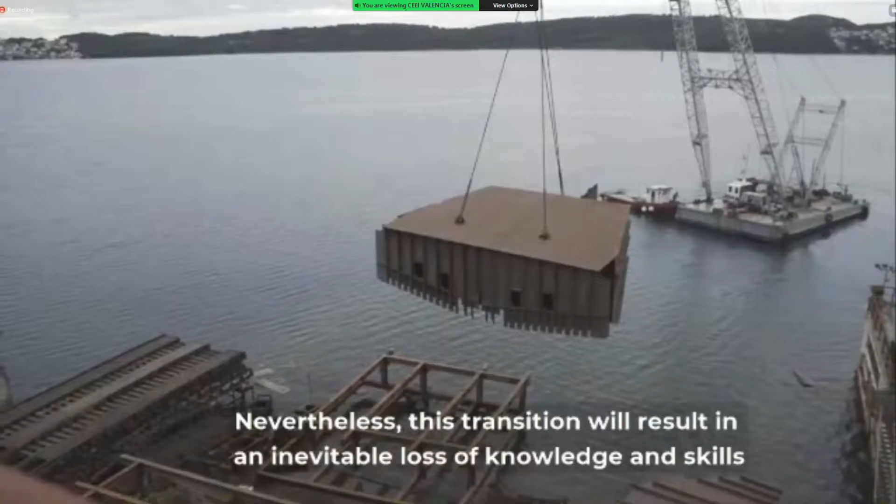Hello from Split. My name is Martin Buchan and I'm Senior Advisor at the Department of Economy, EU Funds and Agriculture of Split-Dalmatia County, one of the associate partners of the Interreg Med project Blue Deal. In our county, there is an ongoing strong reorientation from the traditional fishery and shipbuilding industry toward the service sector, mainly tourism. Nevertheless, this transition will result in an inevitable loss of knowledge and skills that the workforce has created during decades of industrial activities. Therefore, the industrial transition should also be oriented on training and preparation of the workforce for novel, innovative technology, especially related to the maritime business.

Marine renewable energy sector, especially blue energy conversion technology, faces challenges to reach commercial scale of application, while workforce requalification offers a sustainable pathway that overcomes current obstacles. This would help preserve the know-how collected over the years, but moreover, it would open new niches and potential for further industrial development and the creation of high-income jobs. We are looking for consultants, governmental bodies, entities working in vocational training, and enterprises that already restructured their workforce to provide guidelines, measures, or courses which would boost the transition process and result in successful implementation of requalification and training programs.

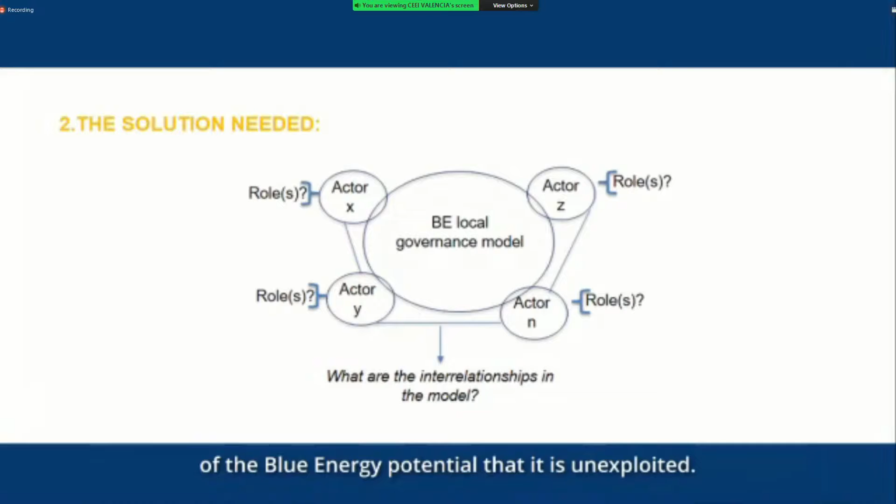The first challenge belongs to the University of Siena, the project promoter, and will take place on the island of Giglio. This is an Italian island situated on the coast of Tuscany. They think that promoting blue energies can help in the transformation of the island into a self-sufficient territory from the power point of view. So they are looking for experts in blue energies able to provide innovative solutions to insert blue energies in the Giglio island.

The second challenge comes from ENEA, the National Agency for New Technologies, Energy and Sustainable Economic Development. The municipality of San Felice Circeo, located in the region of Lazio, in the center of Italy, Mediterranean coast, propose the realization of a simple infrastructure for charging small electric vehicles powered by wave devices, to be located around the infrastructure of the port, in order to enhance and promote sustainable mobility in the city and in the nearby National Park of Circeo.

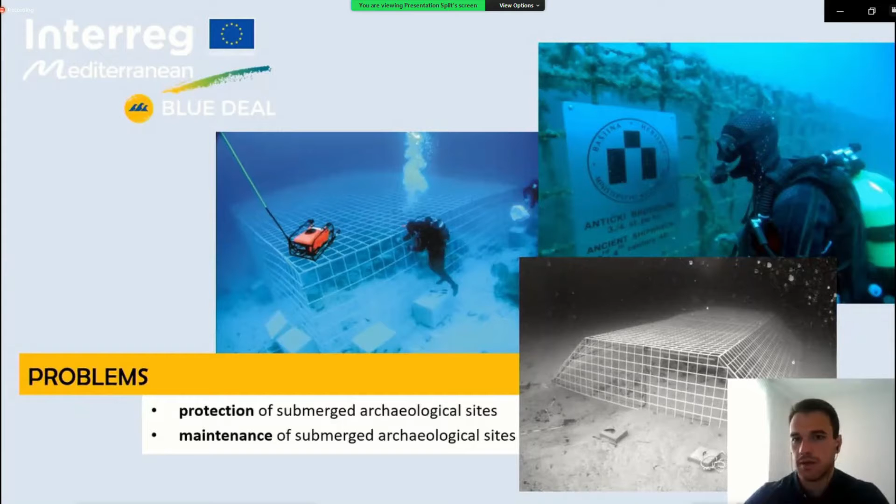The two main problems we detected: one is a very conservative way of protection of submerged sites. Today, the usual way to protect sites is to put an iron cage on them. The opinion is that this protects sites from theft, damage, and decay, but on the other hand, we make these sites unapproachable and gain no benefits from them. Simply put, it's not attractive, practical, or profitable.

Second problem is that Croatia is recognized as a well-known tourist destination, which brings a significant number of tourists. There is always a need to find new tourist offers to keep this number high. This attendance can potentially be a problem because of overexploitation of the coast through building houses, apartments, or hotels, especially in coastal zones where we find submerged sites. Besides, the more tourists come, the higher the possibility of irresponsible behavior in the zone of sites, and because of that, a higher possibility of damaging them.

Having this problem in mind, we looked for solutions that can satisfy both problems. In our thinking, the solution must simultaneously satisfy safety standards and standards of attractive tourist offer. The basic guiding thread was to find a new security and monitoring system and how to create an offshore tourist destination.

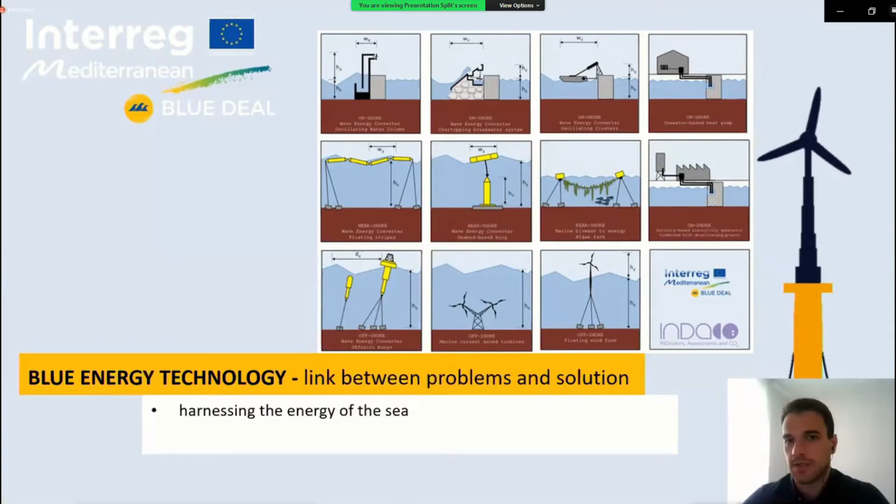And here is our solution. Our solution is to build a floating platform near the submerged archaeological site. The idea is to organize scuba diving on the archaeological site with entertainment content such as treasure hunting, participation in site conservation, and different educational tours to explore the marine environment.

There will be a catering offer in terms of serving food and drinks for refreshment. The platform will use wind energy from windmills and sea energy from floating buoys. The produced electric energy will be used for charging platform batteries, producing oxygen for scuba divers, and for a desalinization process to make drinking water for platform customers.

To approach the platform, there will be a taxi boat running on electric energy with electric batteries. The taxi will recharge from the windmills or buoys.

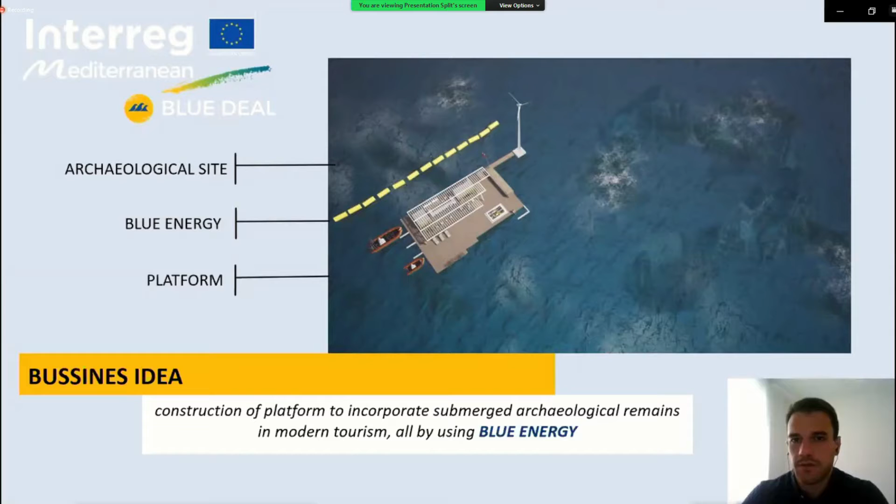In order to ensure successful implementation of this idea, we need a lot of different partners in different business areas. Due to our wish to be more tourist attractive, we need cooperation with tourist agencies, communities, and maybe some cultural societies. To achieve safe diving, we also need diving clubs and diving instructors who will provide short safety and behavior courses. Finally, we need support from producers of diving equipment to have always technically correct equipment.

To explain our business canvas, we will start with the values we will try to offer and create from implementing these ideas, technologies, and services. The benefit of this business idea and solution is, first of all, nurturing and promoting cultural heritage. On the site there will always be ships, and there is always some story about the battles that happened there and things like that.

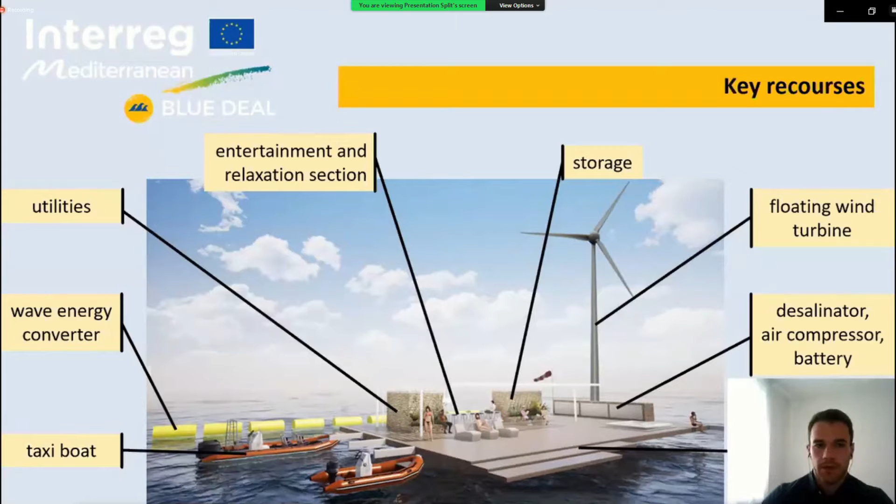In order to create a complete picture, we offer this image to create a sense of what we offer and what we want to achieve. It contains at least most of the resources, values, and services that we want to provide. We see here a floating wind turbine, a desalinator, air compressor, battery, wave energy converter, taxi boat, etc.

And since we are creating values, they are also intended for someone. There are certain groups of people who will use these values, and we suggested a few of them. As it says on the slide, we offer our values to tourists, historians, enthusiasts, explorers, diving clubs, and etc.

To bring this idea closer to customers, we need to reach them through certain channels. Channels we picked to use for advertising are social networks like Facebook, Instagram, and Twitter, websites, maybe like booking, tourist agencies, and information panels and posters.

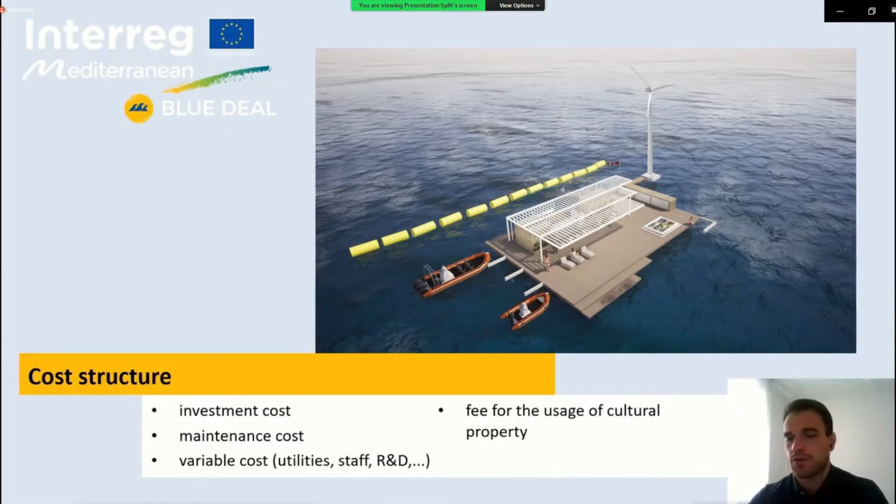To accomplish this idea, we will have different types of costs, but some are the foremost. They are investment costs, which are expected to be higher, maintenance cost, variable cost for staff, utilities, research and development, project development costs, and there is a fee for the usage of a cultural property because the sites are usually state-owned protected areas. In order to satisfy costs, we expect revenues from our activities.

Revenue is expected to come from maintenance and surveillance. Maybe the state will pay us for the surveillance of the site. We expect revenue from tickets, maybe different types of tickets, all inclusive, only for entrance, revenue from diving courses, equipment rental, revenue from a taxi boat, revenue from souvenirs and catering services.

Also, we will have some additional revenues because we produce electricity, and the produced electricity we can sell to the boats coming on the dock. Also, we can use the produced electricity to produce oxygen and water for drinking, which we can sell to the customers of the platform.

So we are coming to the end of this presentation, and we have a little simple conclusion. In order to solve this challenge, we tried to be creative, and it was really productive for us. It was very interesting to see how everyone can put a piece of their idea on the table to create something new and innovative. It gave us new opportunities to think about it and to see how sustainability is possible everywhere, no matter how demanding the task is.

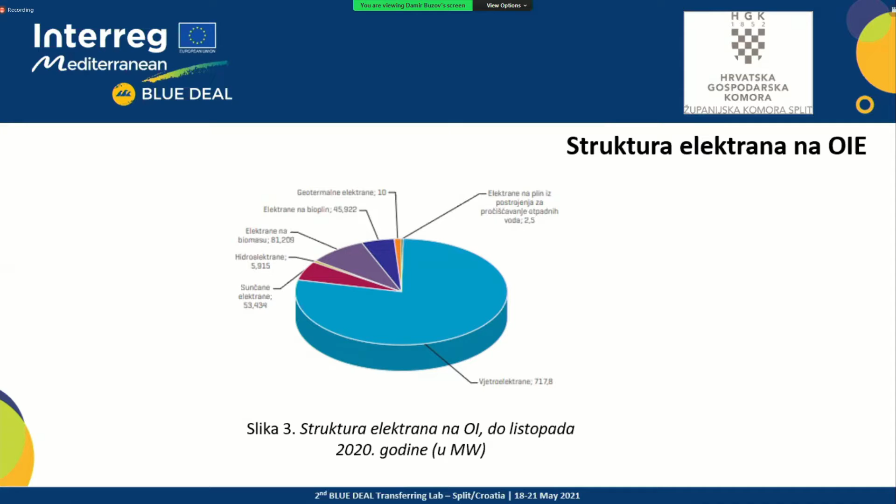As far as the other segments of the market are concerned, we will talk about this within the next few minutes.

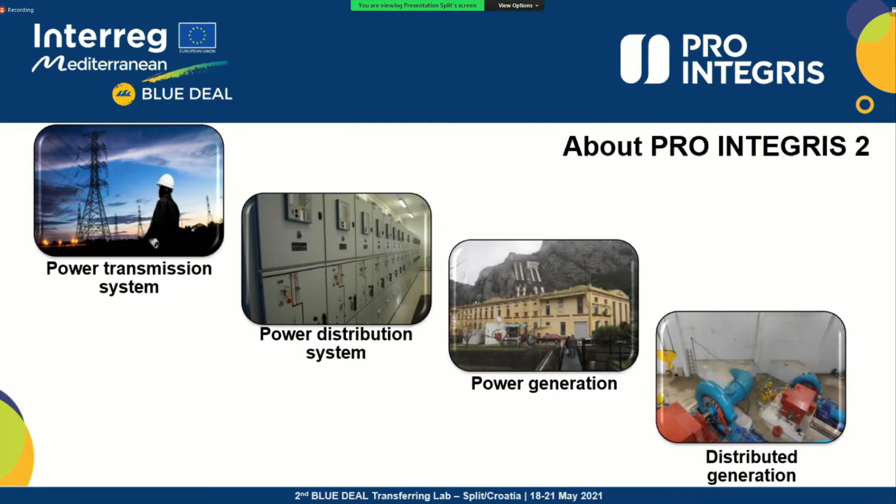Practically we work in all areas of the energy sector and industry, meaning production, distribution, distributed generation, and in this way we came to the opportunity to work in the wind business. If you look at the map, you can see that as a company we work worldwide.

So, working in the energy sector, we came into the opportunity to work also in the area of wind business. Practically, for us, working in wind business is not a lot different from working with any other substation automation systems. We started with basic primary testing like current and voltage transformer testing, and then over time we developed our cooperation with companies working in this business, doing protection testing, engineering, SCADA system testing, and similar things.

On this screen, you can see the list of the projects we already participated in. There are lots of projects. Recently, the two latest projects we are working on now are Hornsea 2 and Changhua. These projects are started and are being performed now in Singapore, and today we have more than 10 people working directly in Singapore in shipyards.

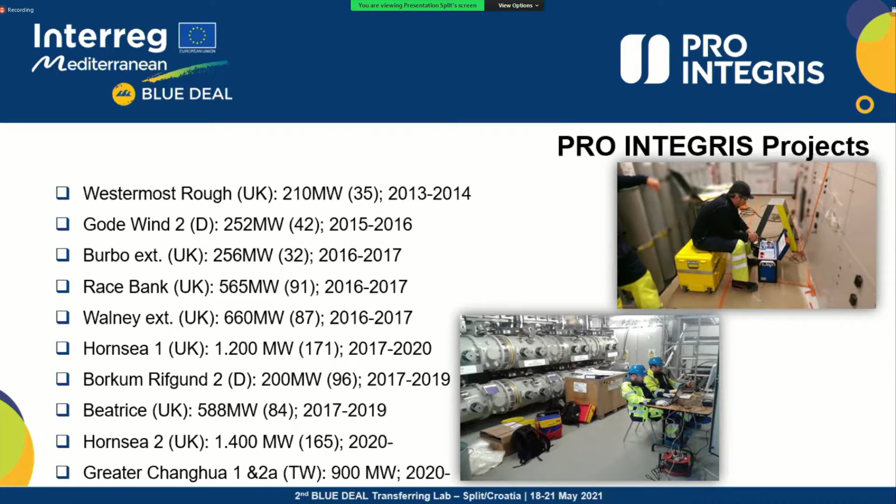You can see from the screens that, for example, Hornsea 2 will have 1.4 gigawatts installed power. In comparison, Croatia now has around 2.2 gigawatts consumption, so it's a huge amount of energy. This will be produced by 165 turbines, around 8 megawatts per turbine.

There are two ways of transporting energy from the wind farms to shore. One is with an offshore AC substation at sea, where you have transformation from middle voltage to high voltage, and then with the high voltage cable, the energy is transported to the onshore substation. There is also the possibility to have an HVDC converter station, where you transform AC energy to DC transmission, and then with DC energy you go to the onshore substation where you convert back to AC energy.

Really, I don't know the exact reason — I think it's a calculation of what is the optimal solution for energy transportation. Our experience so far is that we worked mostly on normal AC substations, not on HVDC substations.

I will show you shortly what is the scope of the work generally that we do in this wind farm business. This is the example of Burbo Bank substation, where on this map you can see how the whole system is geographically positioned. You have the offshore substation in the middle, with 8 strings and 4 turbines per string, each turbine with 8 megawatts.

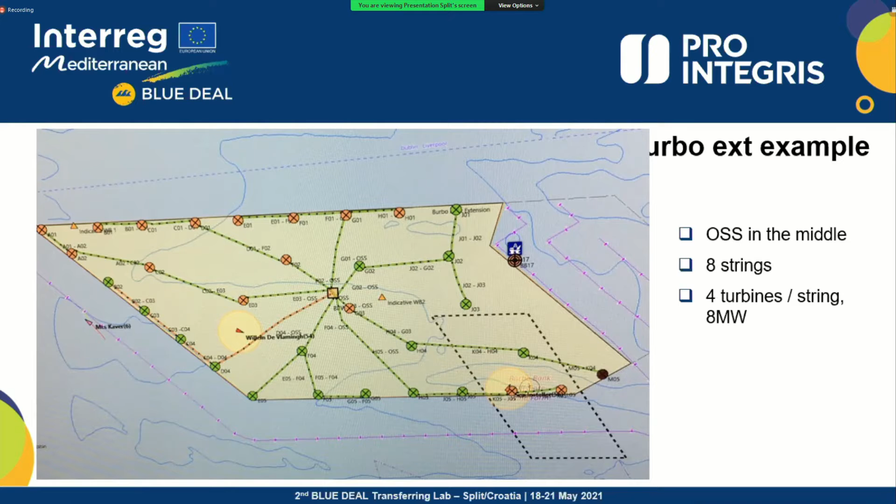In a shipyard, the offshore substation is constructed, and then erection and whole power system testing is done in the shipyard. As you can see from the slide, the estimation is around 3 to 4 months for construction and 3 to 4 months for erection and testing in the shipyard.

In the shipyard we have the high voltage substation and middle voltage parts. For the high voltage parts, here you can see the picture of a 220 kilovolt GIS system, gas insulated system. This is used when you don't have enough distance for such high voltage. This substation consists of one single 220 kV bus bar with two transformers and one export cable feeder to bring the energy to the onshore substation.

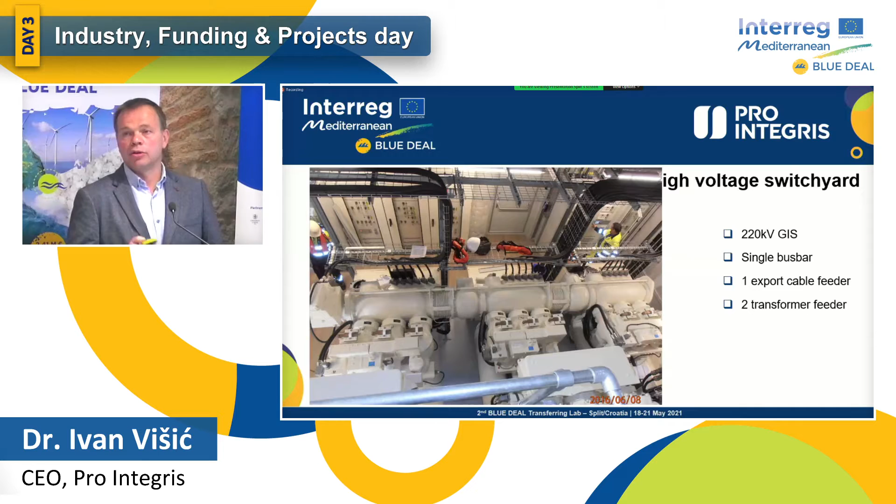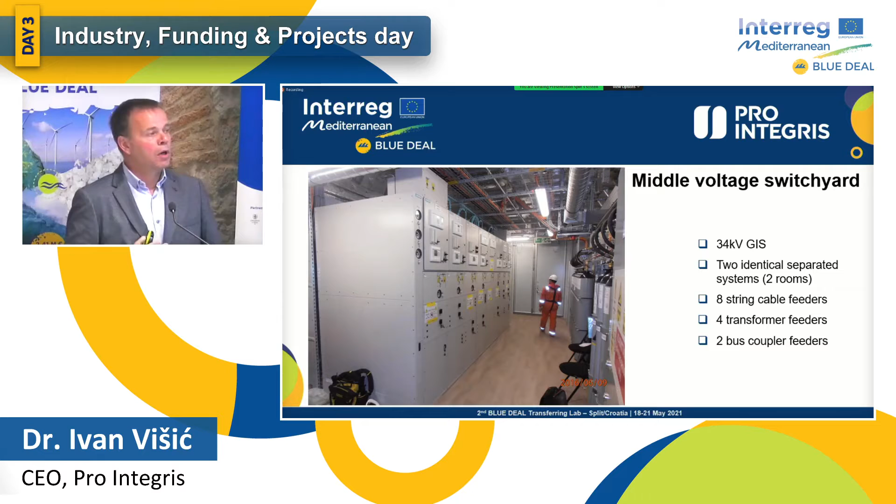The power transformers — we have 2 power transformers stepping up the voltage from 34 kilovolts to 220 kilovolts. Each transformer is 200 MVA, with oil natural, air natural cooling. What's specific is that the radiators are mounted outside of the house, which is normal because we use the cooling of the wind to also cool the transformers.

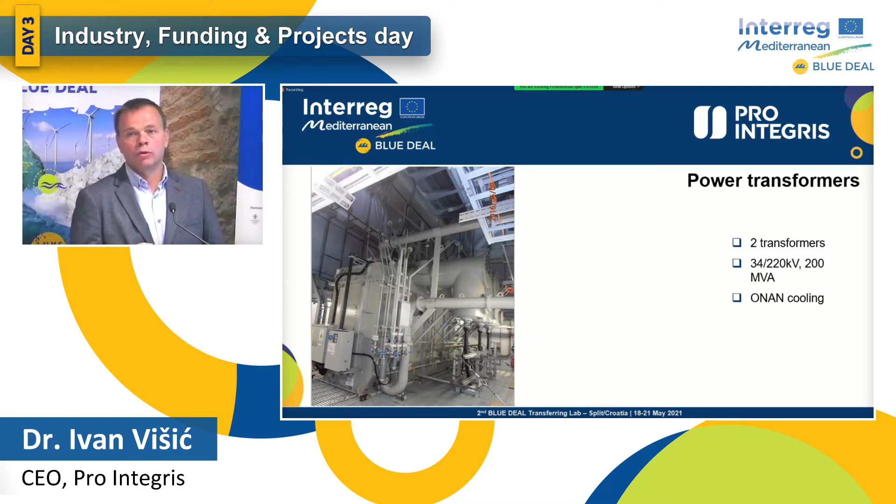When the work in the shipyard is finished, we have to transport the platform and the base, called the jacket, to the sea. For this, a barge is used, and this work takes around 2 weeks from sail away till placement. For Burbo Bank, the offshore platform was based in the Irish Sea, so the time was around 2 weeks.

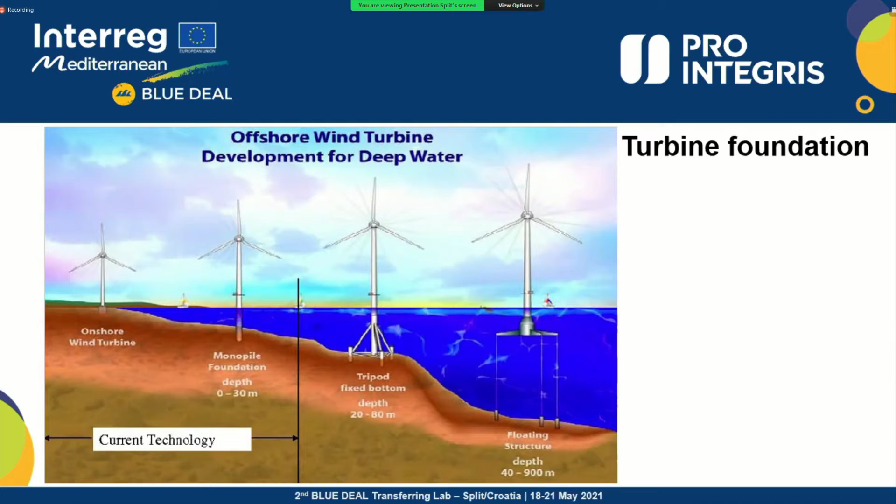Generally, there are different ways of foundation for wind farms, wind turbines, and platforms. Mostly so far we are using monopile foundation, because in the Irish Sea and the North Sea, where all those projects were installed, the depth of the sea is not above 30 meters, but there are also other ways of turbine foundation.

If you compare the turbines produced so far, in 1991 the turbine was 0.45 megawatts with a blade diameter of 35 meters. Today we've arrived at 8 megawatts with more than 160 meters of diameter. And as far as I know, today we are also producing wind turbines with 10 megawatts and more.

There are also some special equipment that we have to use at the sea, so you have to be trained and educated to work at the sea.

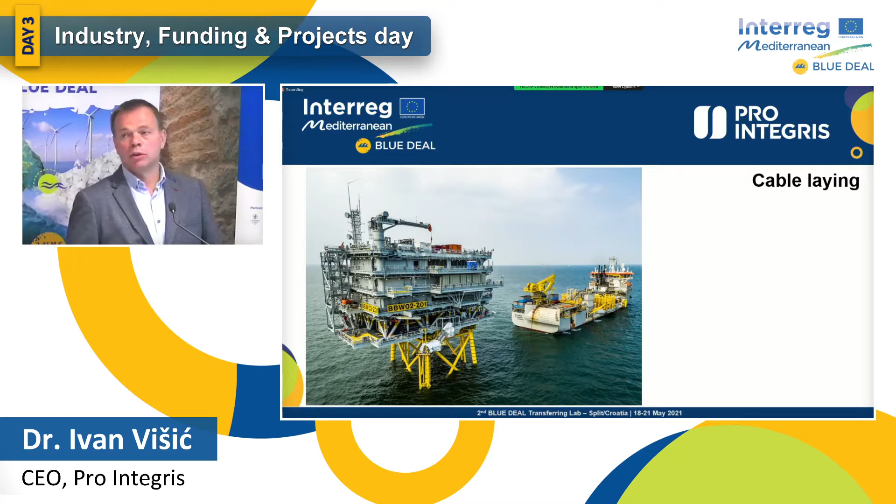And also there are special boats that are used for turbine mounting at the sea.

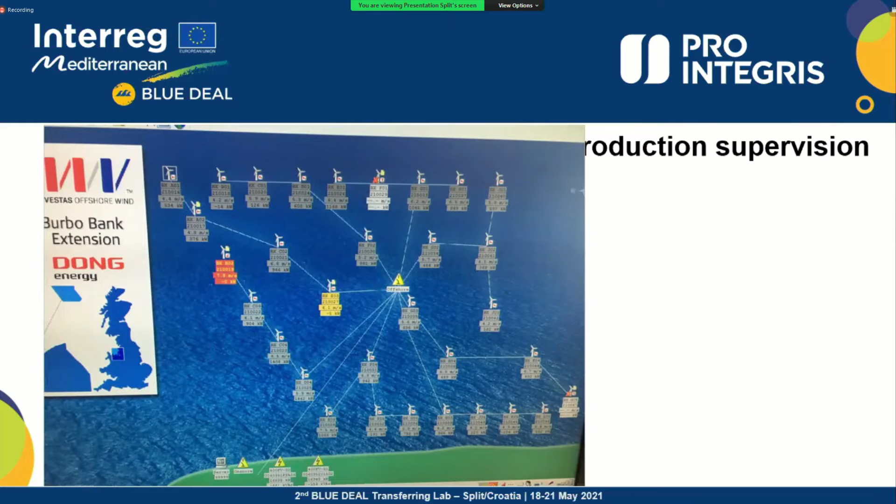At the end, when we commission and put into service the wind farm, you have different SCADAs that are used to supervise and control the wind farm. Here you can see one example of the wind farm SCADA with which you are supervising the production of each turbine, or you can see if there are any problems on each turbine.

So generally, somewhere in the invitation to this presentation, I saw the question: what are the benefits of those wind farms, or offshore wind farms, for the local community?

Generally, from my perspective, I can say that this would mean more work for shipyards and more work for our power industry here. For a local community, I can see the produced energy. If you can produce some amount of energy, this would mean a lot for the local people and also for the whole country.

So, this is the end of my presentation. We are a company from Split, but we also have offices in Zagreb.

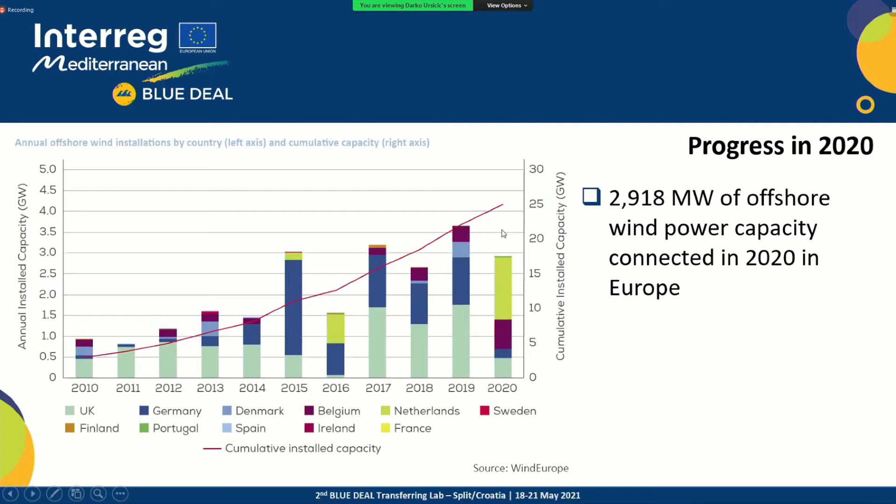In the next slide, we can see the breakdown of European countries. There are a total of 12 countries with some installed capacity, but you can disregard everything after number 5, because UK, Germany, Netherlands, Belgium, and Denmark have, I believe, 99% of overall installed capacity. All others have just a few turbines installed and some, I don't know how to call them, learning projects ongoing, like 1 or 2 turbines.

On the asset side, packages include wind turbines, foundations on which turbines are built, interarray cables connecting turbines inside the wind farm, and export cable connecting the wind farm to the grid overall. There is HV equipment, of course - high voltage transformers, switches, and similar equipment. SCADA and protection is something our colleagues from ProIntegris are experts in. Offshore substation, there was a picture in the previous presentation also. An onshore substation is not different in any way from similar substations for other types of power plants.

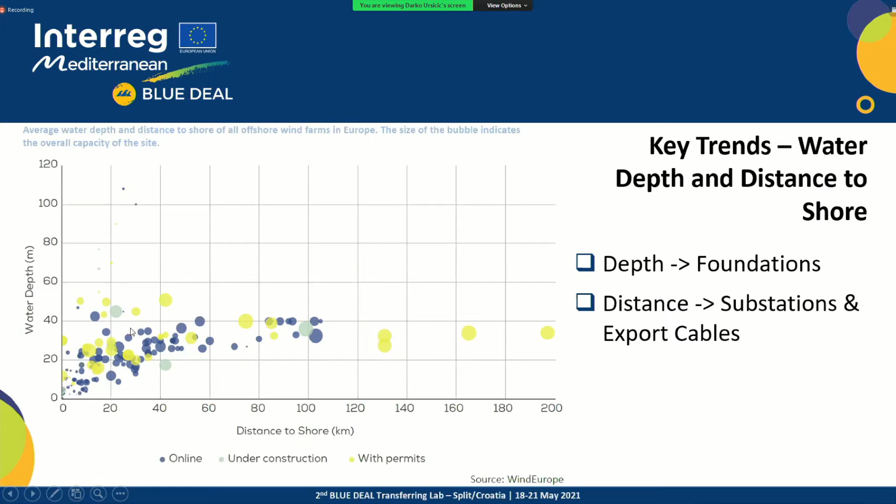Now we go through these different packages. The first one is foundations installation. The vessel used is a floating crane.

This is a floating crane or jack-up, but mostly it's a floating crane because that's how it's done. In this picture, you can see how the floating monopile is pushed by tugs to the area below the crane, where it is upended, positioned, and then hammered down. This process is sensitive to weather, waves and wind. We cannot do it in strong wind or big waves.

The greatest risk is seabed conditions. Investigations are performed, but you never know. There could be boulders, which are big rocks present underneath the sea bottom. Another condition is erosion. You do an investigation, and after maybe 2 years, because of erosion, the sea bottom can look very different than it was then.

The problem with this geophysical survey is limited depth. We cannot properly survey the full depth in all locations, so that is always one risk coming from that.

Scour protection is just the dumping of big stones designed to keep the area around the foundation in place, not impacted by erosion.

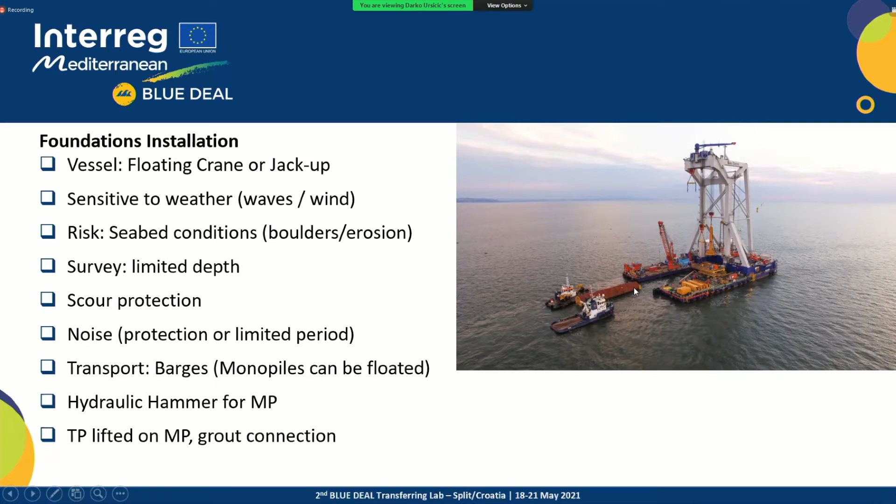For jackets, everything is very similar, except they are not hammered down - just the corners are hammered down with piles similar to the monopile. Floating is a bit different, but then you fix it with anchors, which is in a way a similar operation.

The next work package is wind turbine generator installation. Every wind turbine has a tower, a nacelle - the part where the generator is - and 3 blades. We have a nacelle factory and a blades factory, while tower sections are sourced from outside.

There are 3 big suppliers: Siemens Gamesa, Vestas, and GE. They produce nacelles and blades internally, having factories for that. Tower sections are sourced from suppliers.

So if it will be in the Mediterranean, they could probably have some suppliers in the Mediterranean. As I know, some sections are already produced in Spain, but I believe it's the Atlantic coast of Spain.

There is a pre-assembly site in the harbor where towers are erected - sections 1, 2, 3 are built one on top of another. Then it is installed with the installation vessel offshore. At the pre-assembly site, nacelles are completed and blades are repaired as needed.

The vessel used is always a jack-up. We cannot install the turbines with a floating vessel because of the movements - we cannot install a turbine in that way.

It is very sensitive to wind, so the wind limit is around 12 meters per second for blades. Tower and nacelle can sometimes be installed in slightly stronger wind, but not the blades - they are light, very long, and have to be positioned very precisely. So wind is the problem.

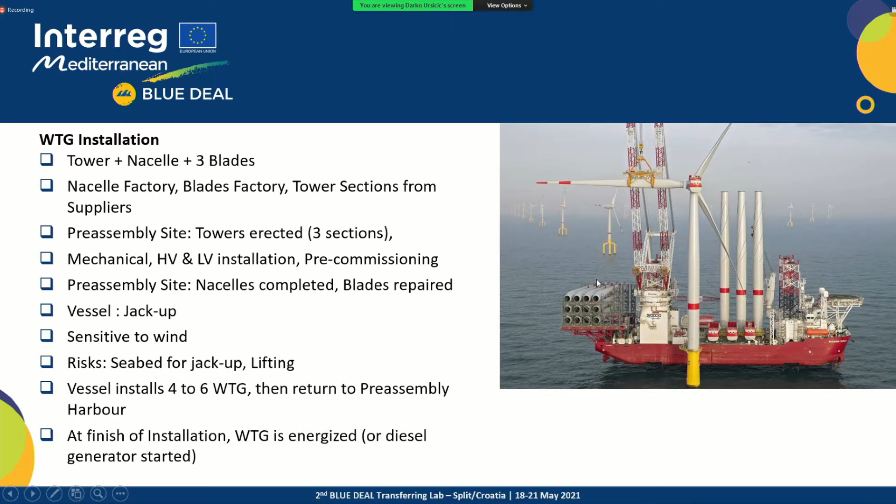Then the second package is wind turbine commissioning. Vessels are DP2 flotel vessels like this one in the picture below, or crew transfer vessels. These are small vessels, like the small vessel behind the big vessel in the picture.

In the past, when wind farms were close to shore, it was possible to do everything with smaller crew transfer vessels, and the crew would sleep on shore in a hotel every night. But as wind farms are now very far out, for example Hornsea wind farms, you need to sail for almost 9, 10, 12 hours depending on speed, so it's not possible to go onshore every night.

So people are sleeping and living there for 14-hour shifts. They are 14 days offshore, then 14 days back at home taking a rest.

The commissioning is sensitive to waves, so if there are waves, you cannot transfer people to the wind turbine. Usually all these vessels have some walk-to-work gangway—it's a hydraulically compensated gangway used to connect to the turbines.

What are they doing there? They are completing the remaining completion tasks, for example low voltage or lift completion or whatever. Ideally all that should be done onshore in the pre-assembly harbor, but it is not always so. That needs to be done before they can do the proper commissioning.

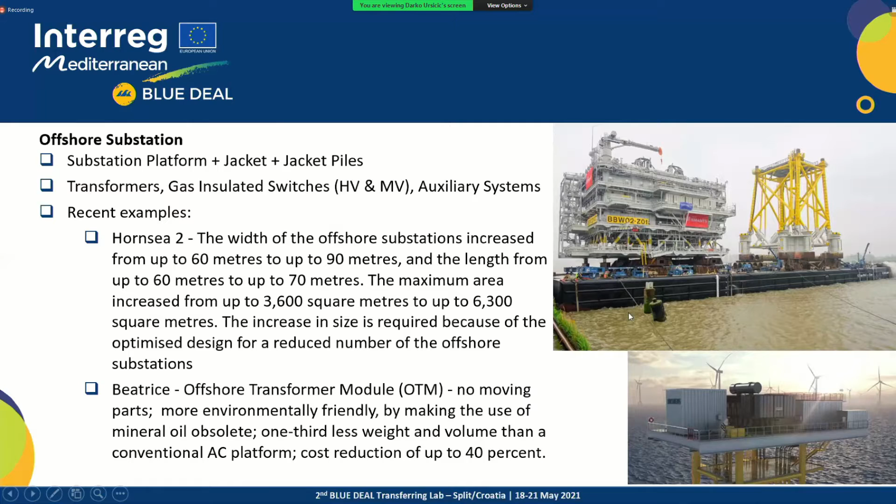The other example is from the Beatrice projects, in the north of Scotland. This is a slightly different concept - it is an offshore transformer module, where different modules are just added together. They claim this makes improvements in less weight and cost reduction, but on the other side, it is not as safe as a traditional platform, and it is not easy to do reworks or anything. So these are two examples of what is going on.

For the end, I ranked different offshore wind farm asset packages by opportunities for local companies in the Mediterranean. I think the first one is onshore substation - it will be done by local companies, by local contractors. It can be done by others, but there is no reason why it should not be part of the local content. Then export cables onshore - it is just high voltage onshore cable, and it also can be done by locals.

Then foundations, fabrication and installation. Fabrication can be done locally - it is monopiles or jackets. There are some good yards in the Mediterranean, we are very capable in it. But again, the main issue will be whether they can be better than the competition from Asia, because jackets are already being produced, I believe, in Dubai, and I don't know what was the other location - Singapore or Vietnam.

It needs to be competitive to these far locations, and of course for logistics it's better to be closer. So yeah, it is a good opportunity.

In installation, I'm aware some Mediterranean companies have floating cranes capable of installing foundations, and they are doing it. But I think there will also be some external non-Mediterranean vessels, because I don't know if there is enough capacity. Offshore substation is similar to this.

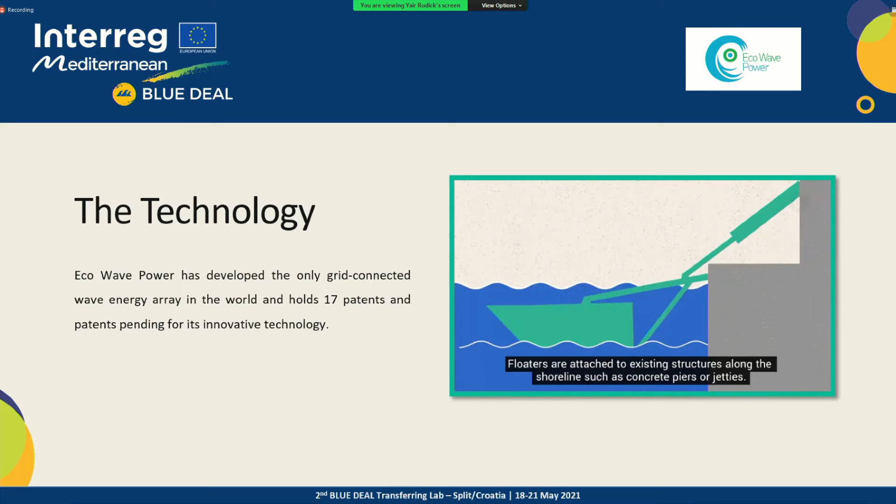It's a patented technology for which we hold 17 patents, including patents in Europe and the United States, as well as an international PCT. The way the technology works is that we install floaters to existing marine structures such as piers, breakwaters, and jetties. I'll explain how we generate electricity with this short video.

You can see that the floaters move up and down with the motion of the wave. Attached to the floaters are hydraulic cylinders. In these hydraulic cylinders is biodegradable fluid. The fluid then moves through the cylinders to accumulators, which generate pressure.

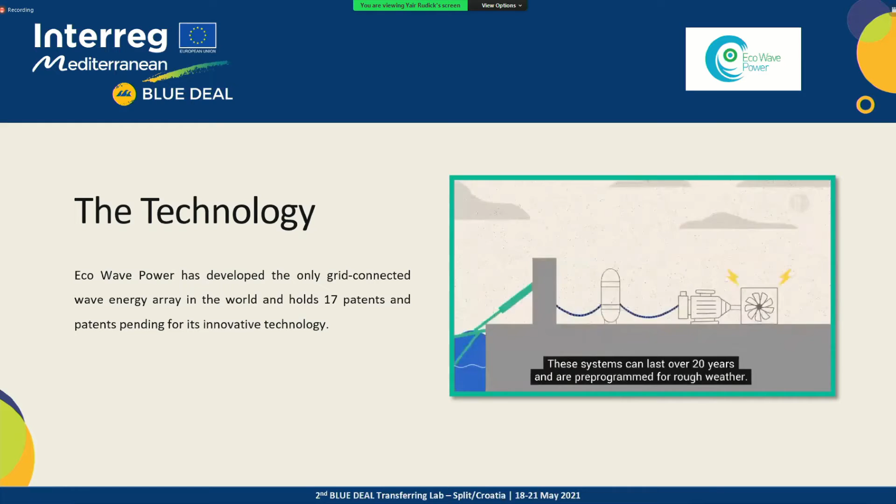These accumulators are, of course, located on land. That pressure is then released into hydraulic motors, then to electric generators, which create electricity, which is sent through the grid via inverters. It's a completely closed-loop system, as the biodegradable fluid then moves back into the system, so it's a closed system.

Now, our technology has really answered those issues which I identified earlier. First of all, in terms of environmental impact, as I mentioned, we install our system on existing marine structures, things such as piers, breakwaters, and jetties. So we're not introducing anything new into the ocean environment. We're actually taking existing structures which have already had some environmental impact and turning them into sources of clean electricity.

Furthermore, as I mentioned, we use biodegradable fluid. So the fluid used in our system is clean, and will have no impact on the marine environment in the case that we ever have a leak or a spill, which we have not had to date in any of our systems.

Secondly, in terms of cost efficiency, the majority of our system and all the expensive components are located on land. So everything like generators, accumulators, and so forth are located on land and not in the water, making it extremely cost efficient. Only the floaters, which you can see here, are located in the water. The floaters are quite simple, mostly made of steel, and are meant to be in the ocean environment. We also don't need all the underwater cabling, the underwater mooring, and so forth that are required for offshore systems, saving us a lot of costs.

In terms of insurability, first, in terms of reliability, as I mentioned, all the expensive equipment is located on land, just like a regular power station, with none of the expensive equipment located in the water. In addition, we have a patented storm protection mechanism, which you can see here in the short video below, where in the case of extreme weather conditions or when the waves are too high for our system to handle, the floaters automatically rise into the upward position and lock into place until the wave heights return to normal. Because of this, our system is extremely reliable, and because of this reliability and the cost efficiency, all our power stations are insured by leading insurance companies.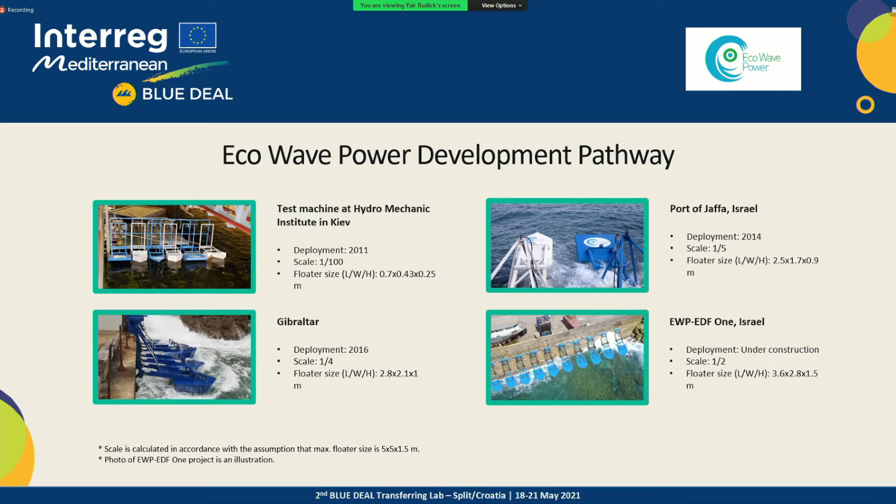The project is envisioned as the first part of a public-private partnership with the municipality of Tel Aviv Jaffa, which could ultimately supply up to one-third of all the municipality of Tel Aviv's electricity needs. So to talk a little bit about the Gibraltar project, I'll go a bit more into that. You can see here a little about the installation. As I mentioned, one of the unique advantages of our technology is that most of the system is located on land.

We're installing our system on existing marine structures. All the installations, grid connections and so forth are actually done from the shore side and not from the water, which saves us a lot of costs and is much more efficient, and also significantly assists with maintenance. Our station managers only need to walk to the structure and do maintenance from there, instead of taking a ship and requiring specialized divers. It's pretty straightforward and significantly more cost effective.

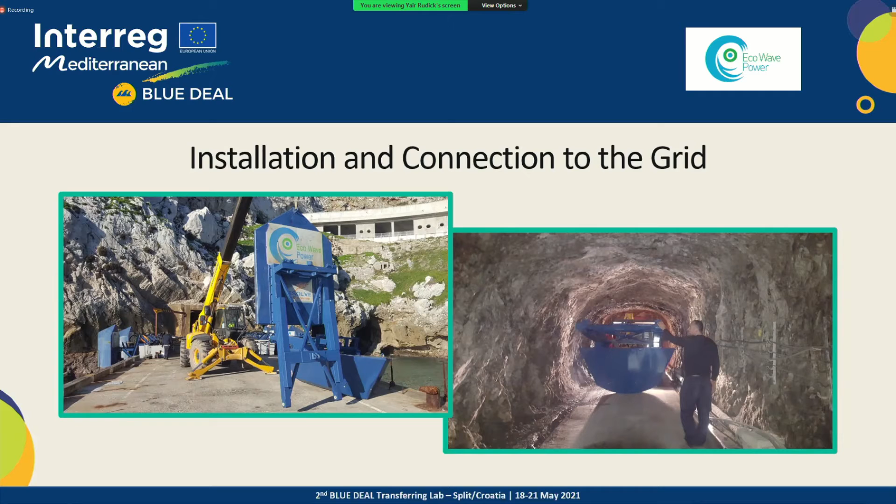The Gibraltar project, which we'll go a little deeper into now, was installed on a former military ammunition jetty in Gibraltar in 2016. The conversion unit, the onshore part of the system containing all the motors and generators, is found in a tunnel nearby, with an access tunnel leading to it.

Gibraltar for us was really a proof of concept, a pilot project, and was the first time our system connected to the grid. This project showed that wave energy, and our wave energy technology specifically, could connect to the grid for an extended period of time, which the industry had struggled with in the past. Our station has been operational and grid connected since 2016.

Even though the waves in Gibraltar are not the highest in the Mediterranean, meaning the amount of electricity we can produce there is relatively lower than other locations, it was a great location for us to implement our project and do testing. From this wave chart, about 52% of the time the waves in Gibraltar are under 0.5 meter.

At the moment our system only generates electricity from waves above 0.5 meter. This allowed us to do significant testing in order to expand the range of our system's generation. There are also several days throughout the year when wave heights exceed 3 meters, even up to 6-7 meters — stormy days that really allowed us to test our storm protection mechanism against very significant and extreme weather conditions.

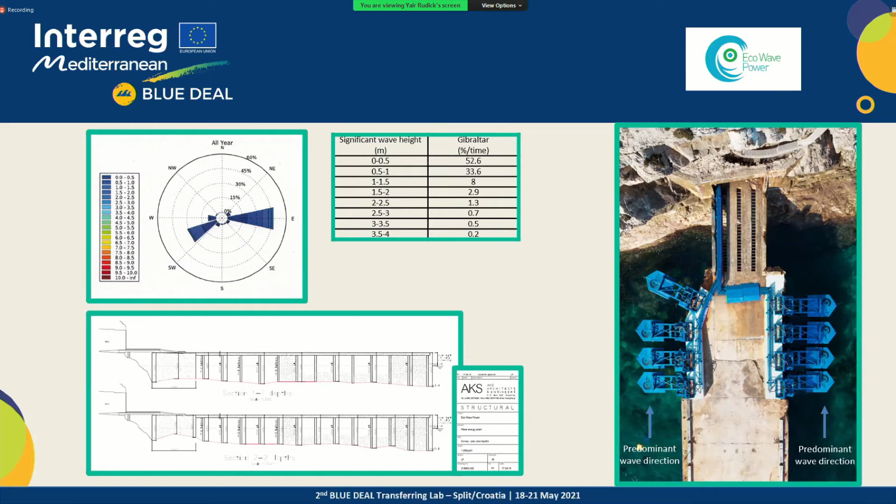So here we can actually talk a little bit about our experience in real conditions. As I mentioned, this is the only grid-connected wave energy array in the world operating under a commercial PPA. So we do have some significant experience in real conditions, and we've really been able to improve our maintenance procedures, which for the most part are quite straightforward. As I mentioned, all the maintenance is done from the shore side. So it's simple things like maintenance of motors, or small reparations of the floaters when needed, or replacing a pin of a hydro cylinder and so forth.

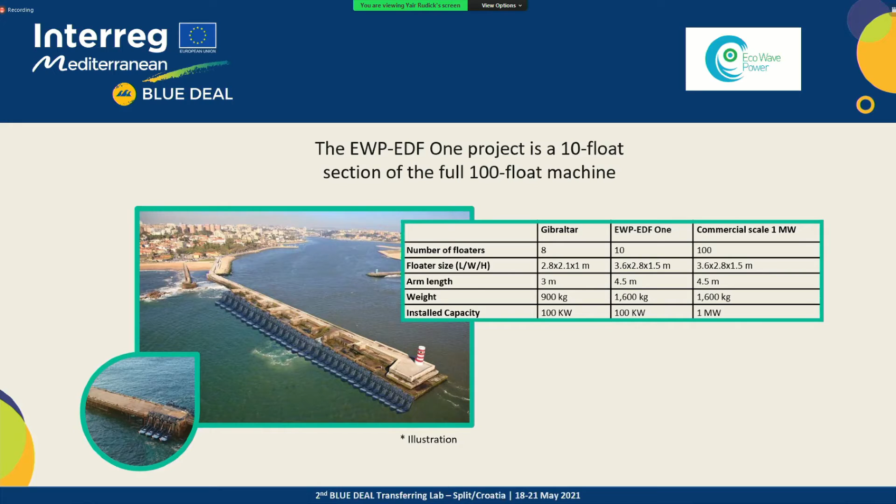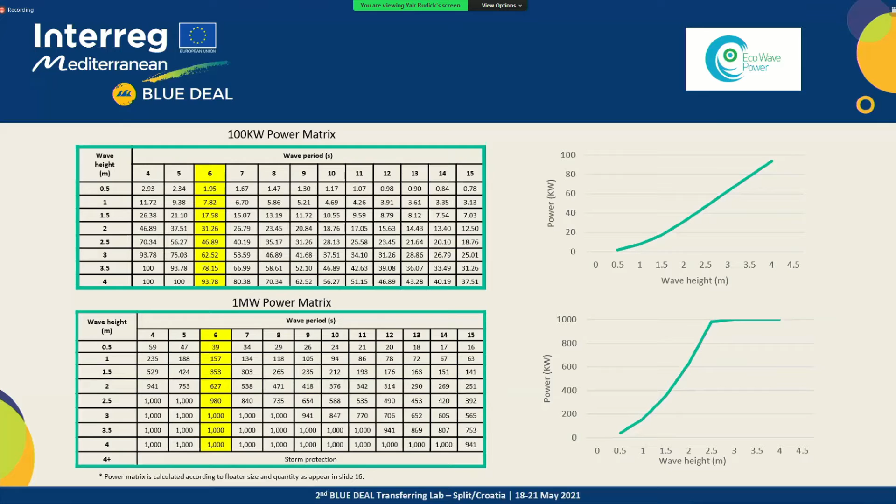In addition to that, just to talk a little bit about Eco Wave Power, our company, at the moment we have over 200 megawatts in project pipeline worldwide in countries such as Portugal, Mexico, Australia, China, amongst others. We also have subsidiaries in Gibraltar, Portugal, Israel, and Australia. We're looking to develop these projects in the coming years. As I mentioned, we're looking to start developing the first megawatt scale project in Portugal in the near future. We see this project already bringing our technology to commercial level commercialization, which will hopefully allow us to access debt financing for future projects and really roll out this pipeline and expand it in the future, bringing our technology worldwide.

So that being said, we really believe that a renewable future combines all the different clean energy sources. At the end of the day, it won't be one clean energy source which will supply all our electricity. It'll be a combination of wind, solar, wave, and other renewables together that will really help us achieve this. You can see here, we're actually testing a combined wave and solar system in our project in Gibraltar and in Israel, and we've already submitted a patent for this.

Seems like I need to end, so I'll just wrap up quickly. We've been featured on CNN, Forbes, National Geographic, and BBC. We actually won a United Nations Climate Action Award in 2019. We are the winners of C40 Cities, and we were recently recognized by the Sustainable Markets Initiative by His Royal Highness Prince Charles, the World Economic Forum, and the Bank of America.

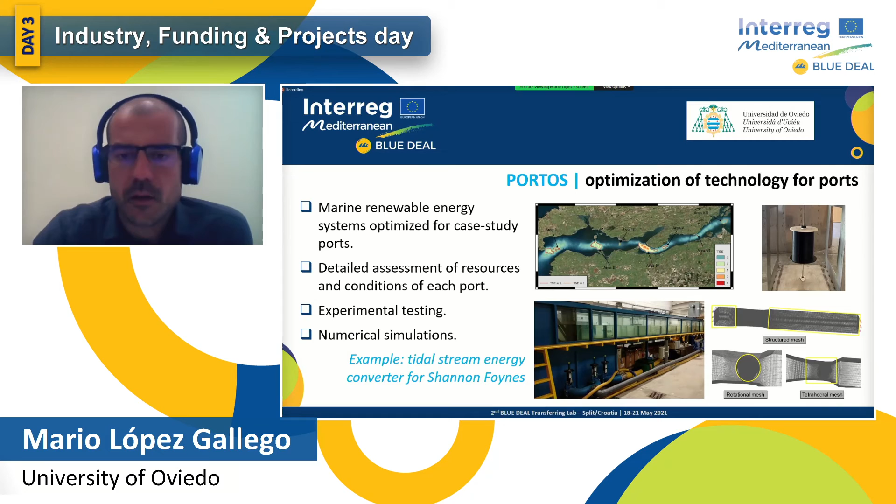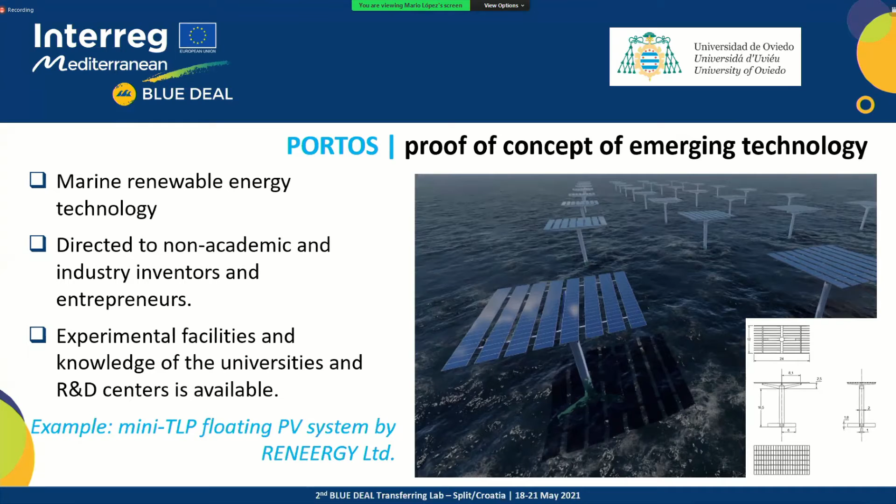More examples of what we are doing: we are carrying out the proof of concept of emerging technology. We have an open call for local companies in the Atlantic area. They sometimes have ideas about novel technologies that can be used to harness the marine renewable energy resource in ports. This is one of the examples.

There is a company in Asturias, Spain, that manufactures solar panels or solar structures, and they had an idea about a kind of TLP, tension leg platform, on which a solar tracker is mounted. They wanted to check or validate this technology, a proof of concept, but they didn't know how to do this, or didn't have the know-how.

They came to the University of Oviedo, and we were doing simulations of the behavior of this structure under waves, wind, and currents, and we are now drawing the conclusions of this analysis.

But there are many other examples. For instance, in the University of Porto, they were testing a new wave energy converter for a company in France, and the same in IH Cantabria, where they were testing in the wave tank a wave energy converter. I believe there is also a new floating photovoltaic system being tested in another wave tank, maybe in MaREI, Ireland.

The call is still open for companies of the Atlantic area to come and ask us for help in testing or validating their devices. To me, it's one of the most interesting parts of the project, because we can give support from research centers and universities to local companies, sometimes small companies, that don't have the know-how for going through this kind of experience.

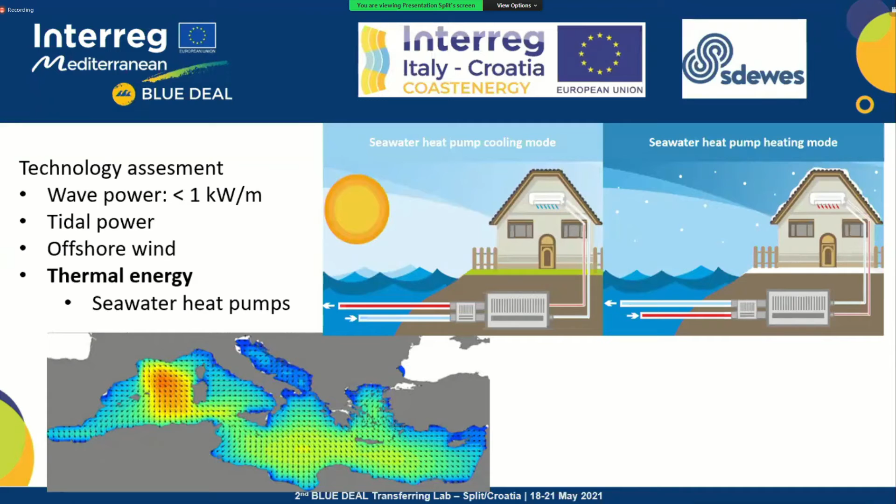For the technology assessment, we first analyzed wave power, but for our area in the Northern Adriatic Sea, the potential is not significant, so we didn't make feasibility studies for this technology. It's similar for tidal power. For offshore wind power generation, there is significant potential, but we are aiming for technologies near the shore, in port areas and urban areas on the coast.

The technology that shows the best potential for us is thermal energy, implemented through seawater heat pumps. On the right is the working principle: during summer, when we need cooling, we throw heat from the buildings into the sea, and in winter, when we need heating, we extract heat from the sea.

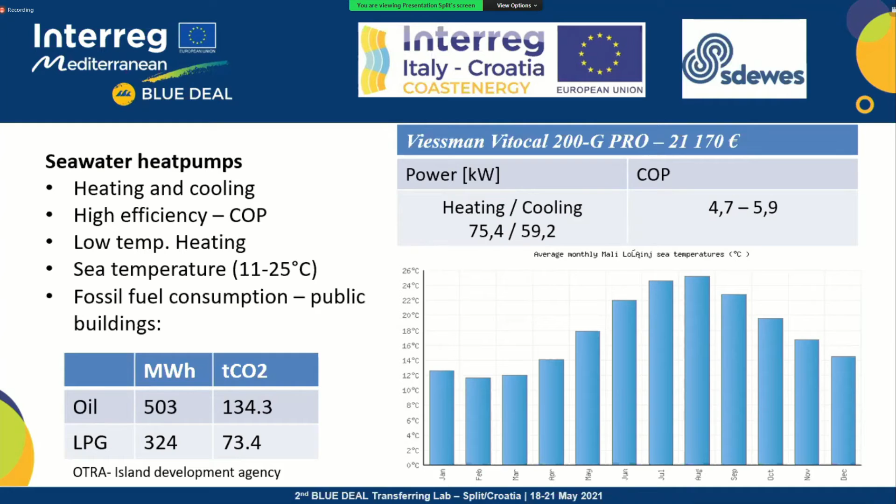The main benefit of seawater heat pumps is that one unit can be used for both heating and cooling, so you don't need two different systems. Probably the best thing is high efficiency, measured by coefficient of performance, which is usually higher for seawater installations than air-to-air installations. One barrier is that to get the best efficiency, buildings need low-temperature heating; for higher temperature heating it can still be implemented, but efficiency drops significantly.

High efficiency from seawater is possible because sea temperature is always stable, staying between 11 and 25 degrees in our area, as shown on the graph. Installing these systems can significantly reduce the need for fossil fuels and exclude them completely for heating and cooling in our area, which is important since there are not many pipelines in the Mediterranean region and on islands in Croatia and Italy.

Here on the right are the numbers for one heat pump. It's important to note that this is not all the cost involved in installation. Much more costly is drilling wells if needed, and laying pipes onto the seabed. On the left are numbers for fossil fuel consumption in public buildings in the Cres and Lošinj archipelago, showing that buildings using fossil fuels emit more than 200 tons of CO2 yearly.

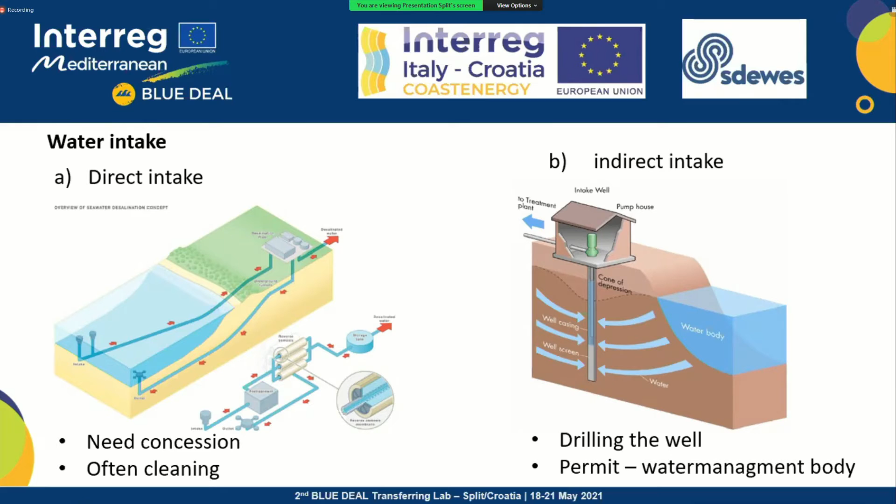There are two types of seawater heat pumps based on water intake. On the left is direct intake, which takes water directly from the sea, requiring water intake pipes on the seabed. One barrier here is that you need a concession, which is still not well defined with the national government, county officials, and similar authorities.

And another barrier is that you need to clean those pipes more or less every year, depending on the location. Also, this is an open loop installation.

You can also have a closed loop where there is a heat exchanger directly put onto the seabed. On the right, there is an indirect intake. For this, you have a problem that you need to drill the well, which presents additional cost, but with that,

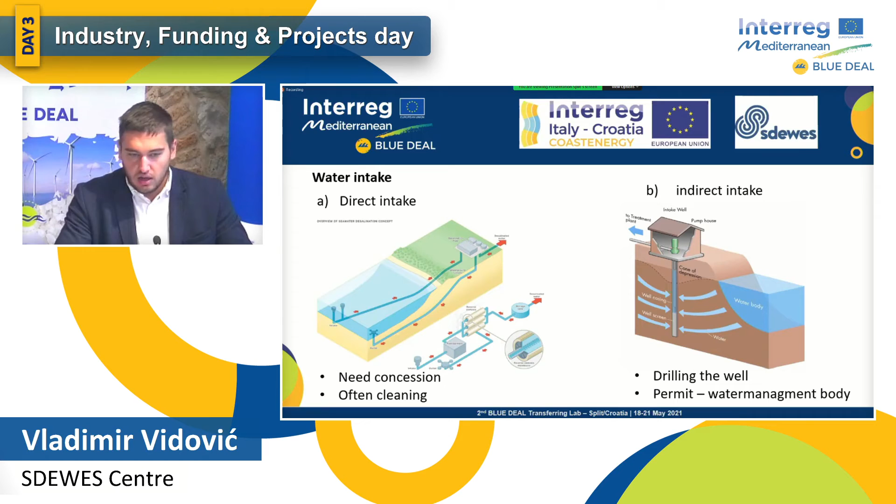you don't need to clean the pipes that often, and you have skipped a really important step, which is asking for concession. You only need to get a permit from the water management body, which is the case in Croatia, but it is similar in many other countries.

After that, we made short feasibility studies, before organizing the first meeting of our local hub. We analyzed only buildings that use fossil fuels. We didn't analyze buildings that have electric heating, since they are quite more efficient. We used data from ISGE, the National System on Information about Buildings. We didn't consider cooling, since most of the buildings we analyzed didn't have cooling systems.

Local hub: for us, it was important to invite and include all important stakeholders from public authorities, research bodies, NGOs, small and medium enterprises, business support organizations, and especially organizations like Energy Agency that have data and information about energy consumption. In our case, we got great support from the local development agency, OTRA, the Island Development Agency.

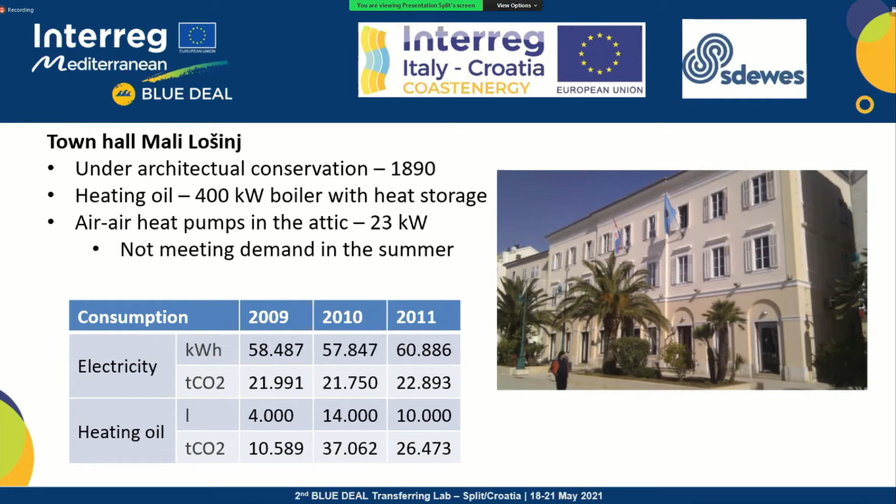So for this case, we would install a new seawater heat pump that would use less energy, emit much less emissions, and cover all the needs for both heating and cooling. Here are the numbers from 2010 and 2011, where we can see that they emitted more CO2 for heating than all the electricity consumption in the building.

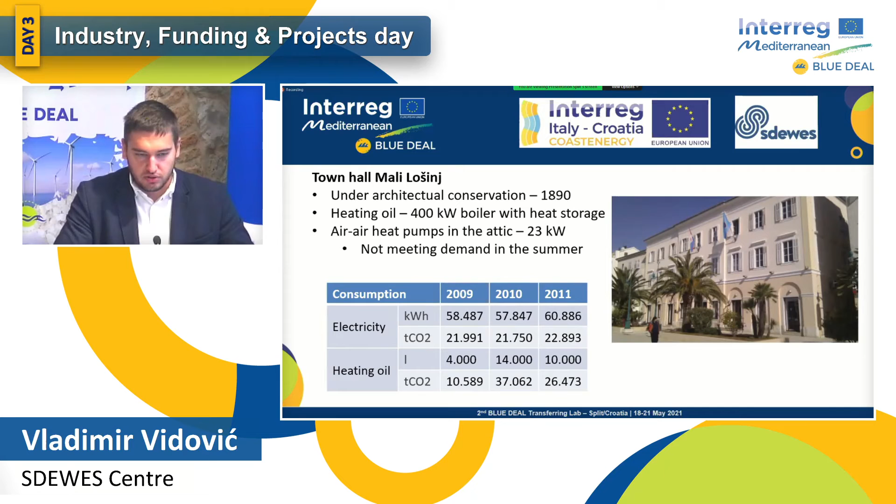We are planning to get financing from either national funds for energy efficiency or European funds.

To give an idea what framework is needed in this case, what is necessary for others that are planning to build in this way: definitely you need to get either a construction permit for the building or to have a certificate that the building is older than 1968, like this one, and to get a certificate from the electricity supplier.

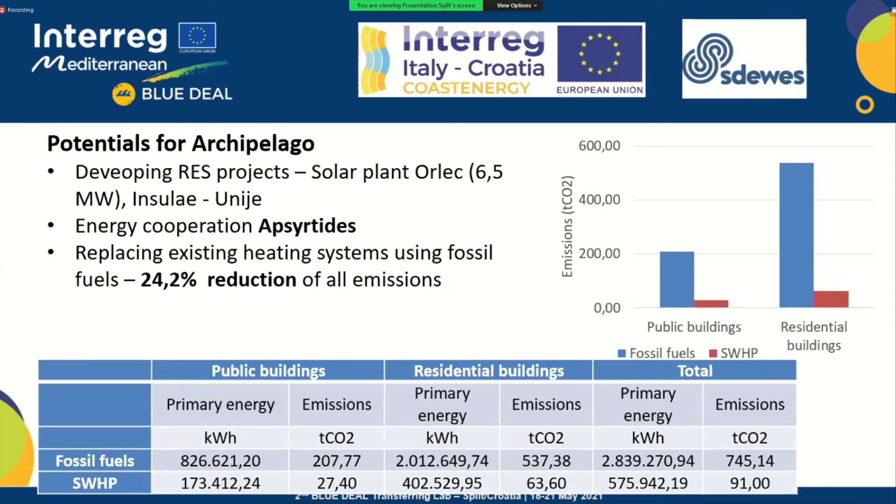So for the whole archipelago, there are great potentials. At this point, there is a big solar plant, Orlec, being built that will have 6.5 megawatts of capacity. And in the Insulae project on the island of Unije, they have built a desalination plant and battery system.

This year the Energy Cooperation Apsyrtides was founded, which wants to further enhance the energy transition on the archipelago.

For us, with seawater heat pumps, we wanted to show how much emissions can be reduced if we replaced all the heating systems that use fossil fuels with seawater heat pumps. In that case, all emissions would be reduced by 24%. On the right image, in blue, is the current situation in public and residential buildings with fossil fuels, and how much less emissions we would have with seawater heat pumps.

We had one more meeting, sadly it had to be online, and next week we are going to have the third one, again online due to coronavirus. The goal is also to share knowledge and best practices in all our areas and implement them in both countries, to widen the network, and connect all stakeholders included in the project. In the future, we would like stakeholders from outside the area to also get involved in the project.

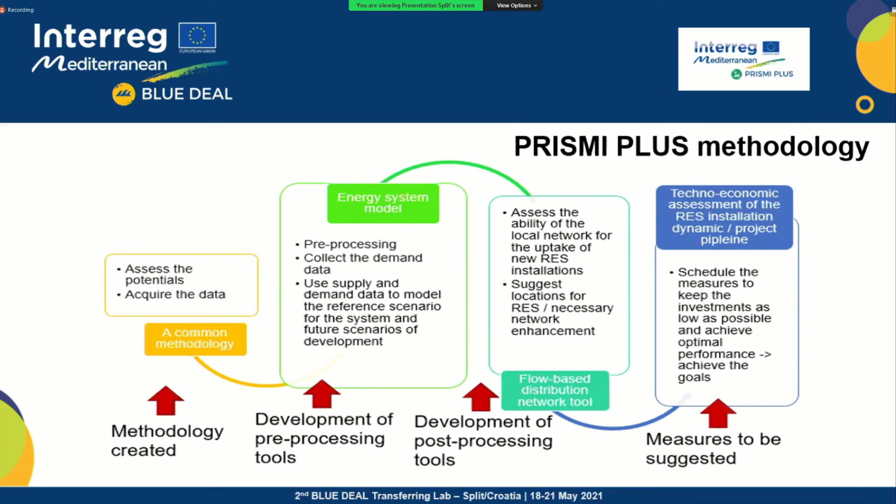This is the methodology that followed the whole procedures for energy planning - from assessing potential and the acquisition of data, both for renewables and for consumption, to the processing of this data so that we could use it for the simulation and analysis of different scenarios, to identify the optimal solution and optimal energy mix for the island. This optimal energy mix would then be tested for technical feasibility of the power grid, and then translated into a strategic and political document.

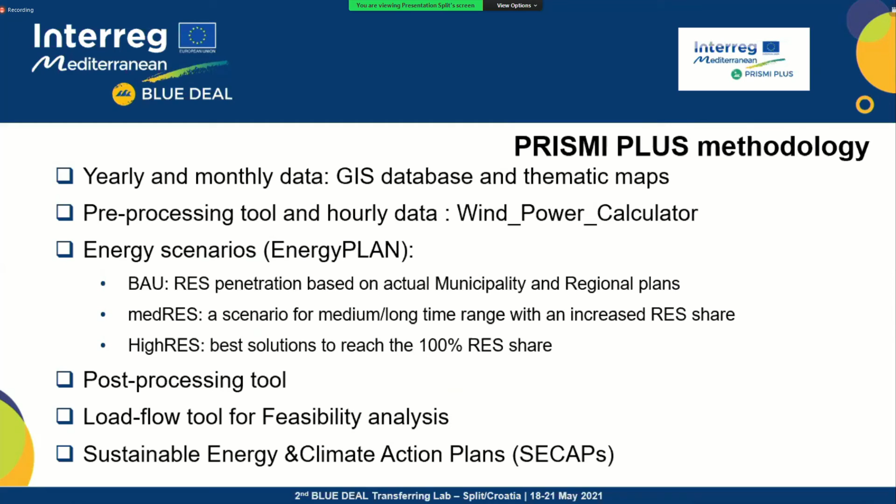Here are all the steps I just mentioned, and for each step guidelines were made to help the user through the energy plan process, and different tools were developed. For instance, for RES potential we use a GIS database, but for hourly data we developed the wind power calculator, able to provide the hourly profile of wind speed and wind power production.

For the energy scenarios, we analyzed three different scenarios with increasing RES penetration and increasing electrification of demand. Then we developed a post-processing tool for easy visualization and understanding of the results. We'll see just a few pictures of all this, along with the load flow tool developed within the project to assess the feasibility of the analyzed scenarios.

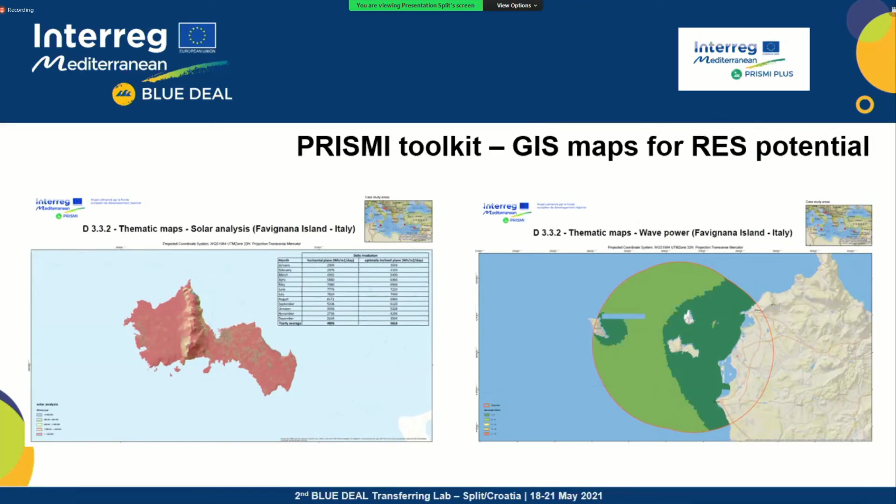On the grid, on the power grid, and the development of sustainable energy and climate action plans as I said before. So here are some images from the previous project. This is the Italian case study, Favignana in Sicily, with the GIS maps for solar and wave potential. This is the wind power calculator, which uses a database from NASA and covers the whole Mediterranean.

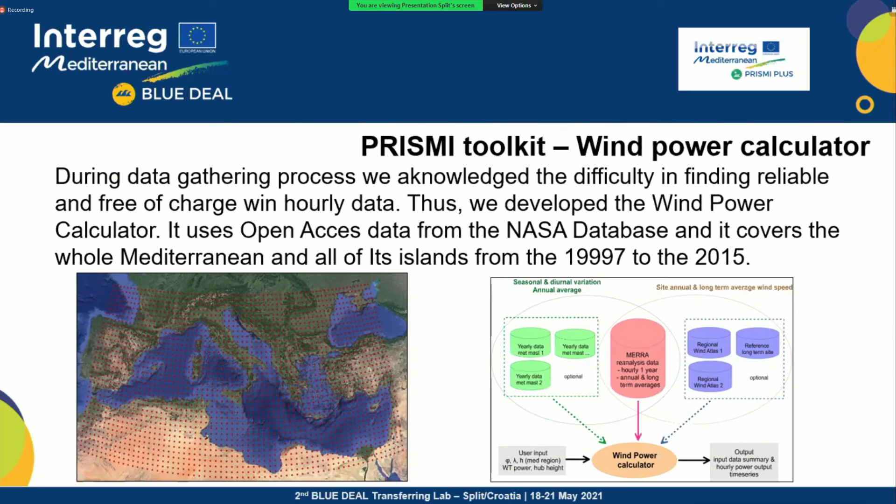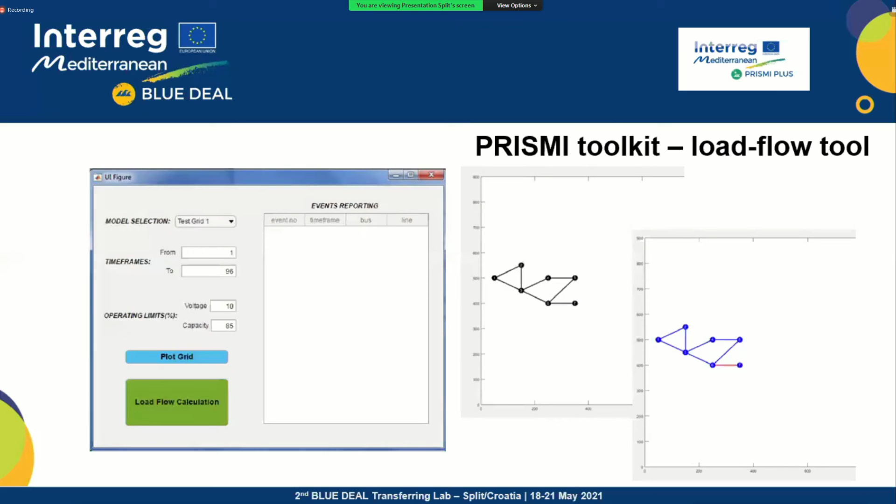This is an image of the load flow tool. As you can see, user-friendliness was very important for us, both for the user interface on the left, and for the results on the right, where you have a topology of the grid. If a fault is detected, it's colored in red, so it's immediate to visualize the problem if there is any. And here is the post-processing tool.